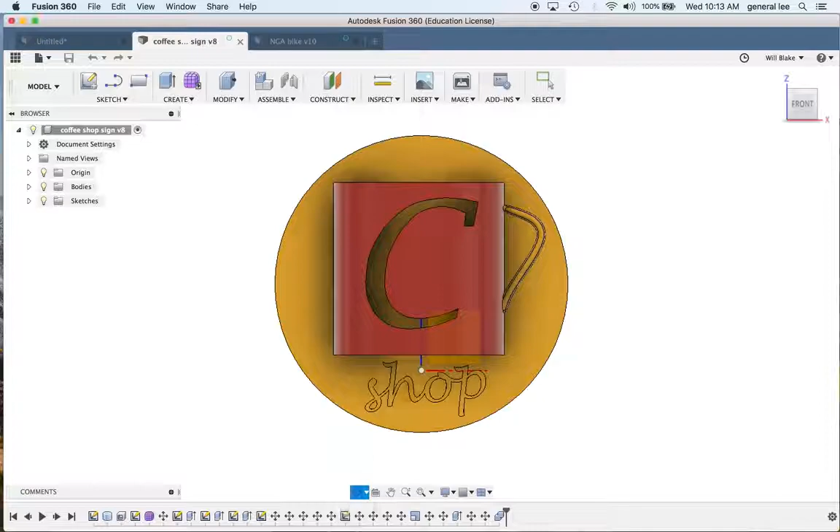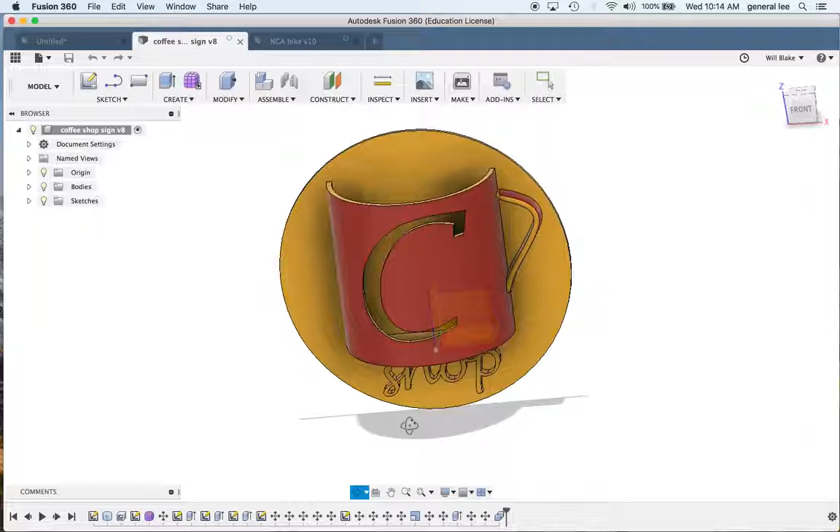So I just wanted to show you some of the designs. This particular sign was something I created very quickly - it's a coffee shop sign that you might see somewhere around. If this was a 2D graphic, that's what you'd see on the wall, but the beauty of 3D is that I'm able to create something that has depth, that you can manipulate three-dimensionally. I could actually print this out on my 3D printer in a variety of large sizes - we're not limited to very small output anymore in the color you see, and I'll generate this at some point in the next couple of days.

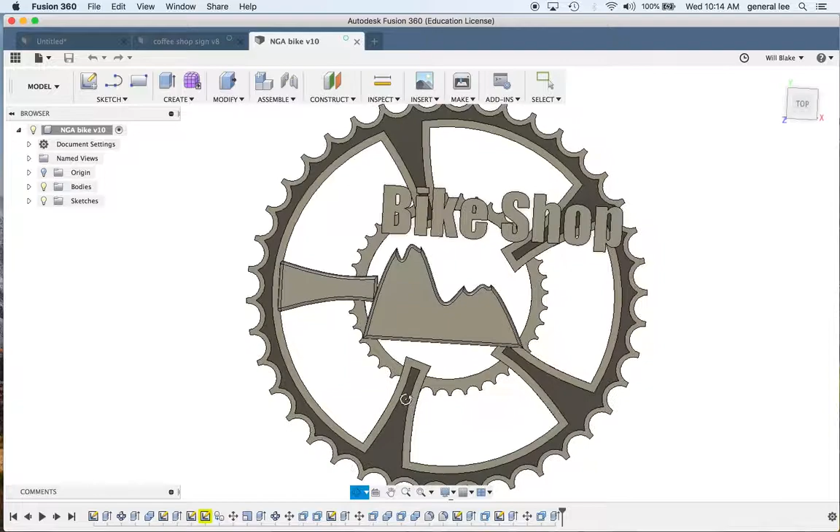Another sign I created was this bike shop signage. If you look at that as a 2D sign, you'd print it in a variety of colors on a metal sign or whatever. But the beauty of 3D is the ability to create that in a three-dimensional workspace, and you can output it as you see it, so it would actually look like the cogs - raised signage like a little mountain range, and we can do it in various colors. I actually printed this one out, and it's on my LinkedIn, one of my LinkedIn postings.

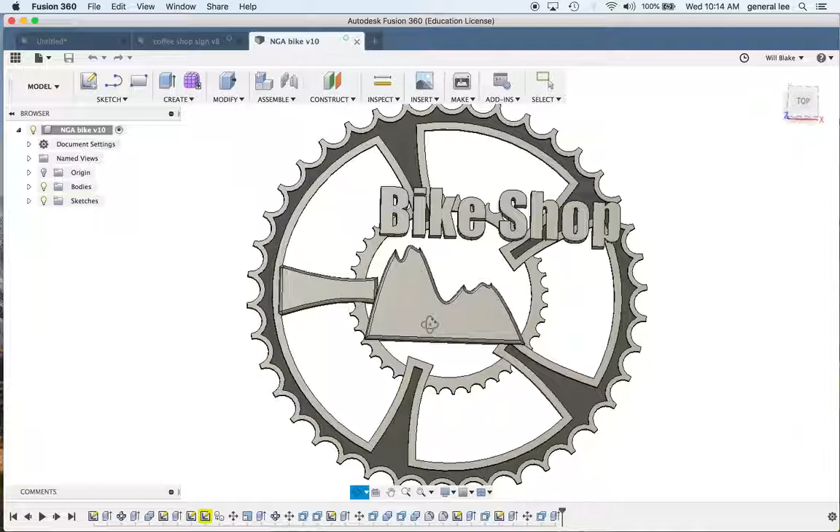So anyway, let's get going. The purpose of what I'm doing is to show you how you can use a 3D design program like Autodesk Fusion 360 to generate 3D graphics. Again, I can't stress how important I feel this is - that we need to bridge that gap, get artists and others thinking in a three-dimensional mindset of what you can do to be competitive, to add a competitive advantage to what you do.

This is just to give you an idea - not of how to use the software, because that's way beyond this, and there are people much smarter than I am - but of what can be done to generate forms very quickly.

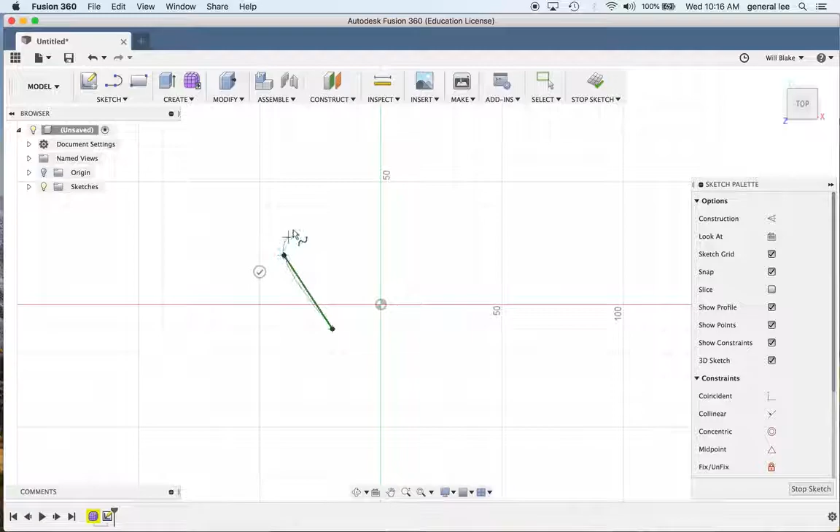So what I'm going to do is create a very simple jug here. I'll show you very quickly how we can generate this shell and generate a handle for it. What I'm going to do is sketch - we're going to sketch a spline right on this two-dimensional plane here. The great thing about splines, if you're familiar with them, is basically a series of points with curvature which we can manipulate, and what we're trying to do is generate a profile here. There are key commands for these various commands, but we're going to generate a few lines. So I'm going to close this sketch, stop the sketch, and you can see that's what it looks like.

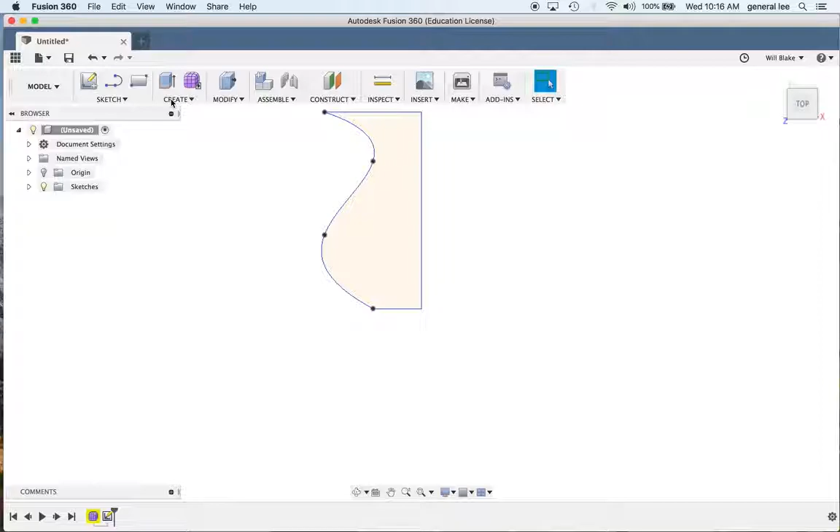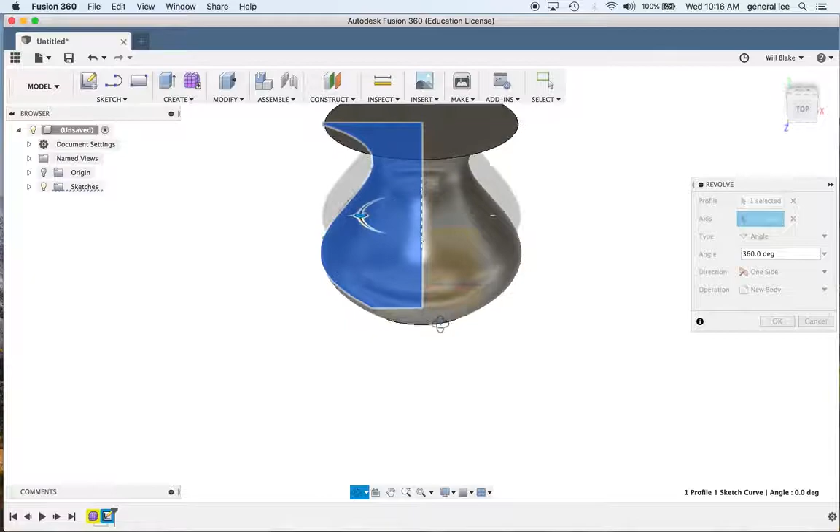What I want to do now is turn this particular sketch, this plane, into a three-dimensional object, and the way we can do that is very easy. I'm going to revolve this particular sketch on this plane, and you can see it's taken that two-dimensional sketch and revolved it around 360 degrees. Now I could have done that at 90 degrees, or 180.

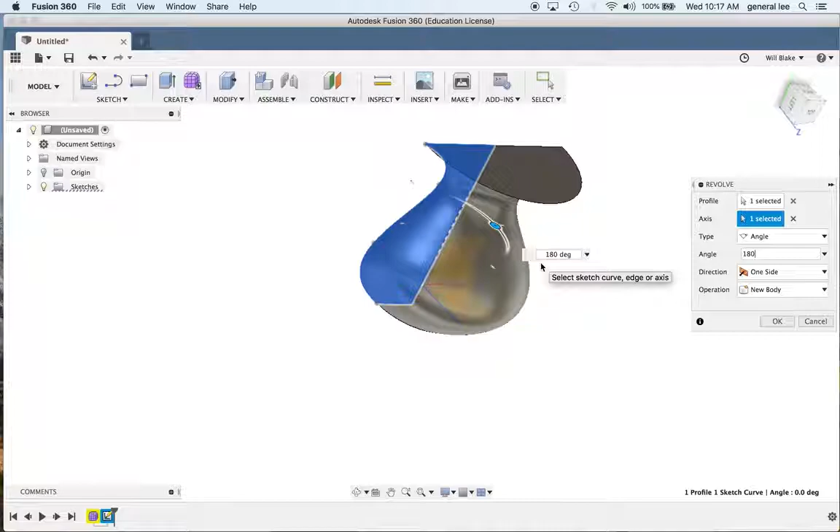Why would I do that? Well, if I was doing this for signage and wanted a 3D look to, say, a jug on a pottery signage, I could do this. Now I'm going to go back to the 360 real quick, click OK, and there we go. That's not a particularly good jug because you can't pour anything into it, so what I want to do is generate a shell of this.

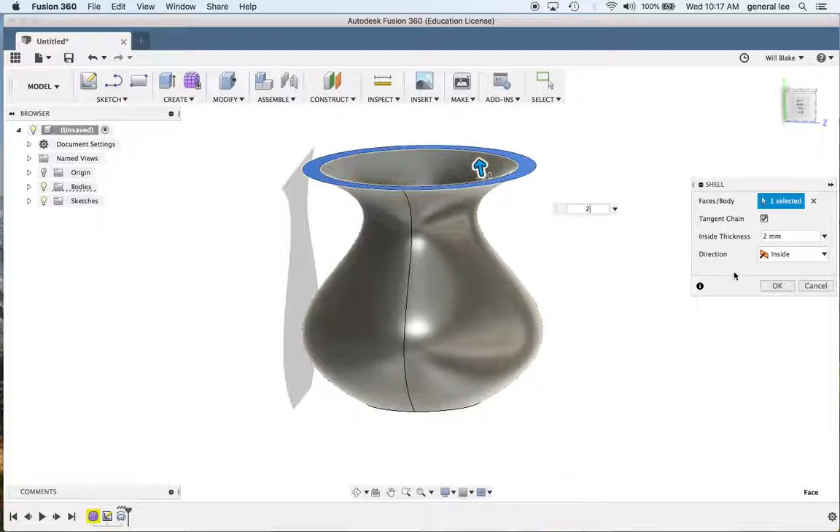So I'm going to select the top, say 2 millimeters, and click on OK. And if we look, we can look down into it, you can see that it's got a thickness of 2 millimeters.

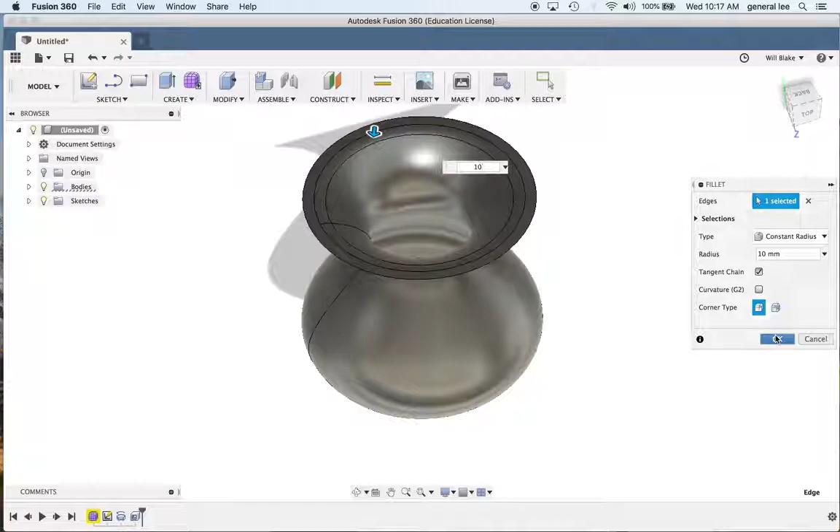Now obviously, a jug doesn't have a flat edge on the top like that, so we're going to modify that. We could do a chamfer, which is a straight edge, or a fillet, which is a rounded edge. Let's say 10 millimeters. If we look very quickly, you can see we have a rounded profile to the lip. Okay, great.

Well, a jug without a handle is not particularly useful, so what I'm going to do is put a handle on here very quickly. The way we do that is to go into the sculpting environment, and I'm going to use the same feature that I used before.

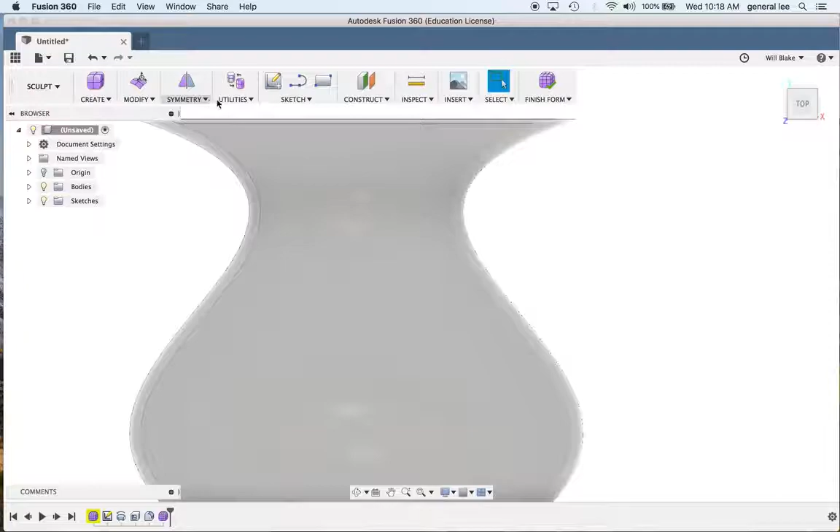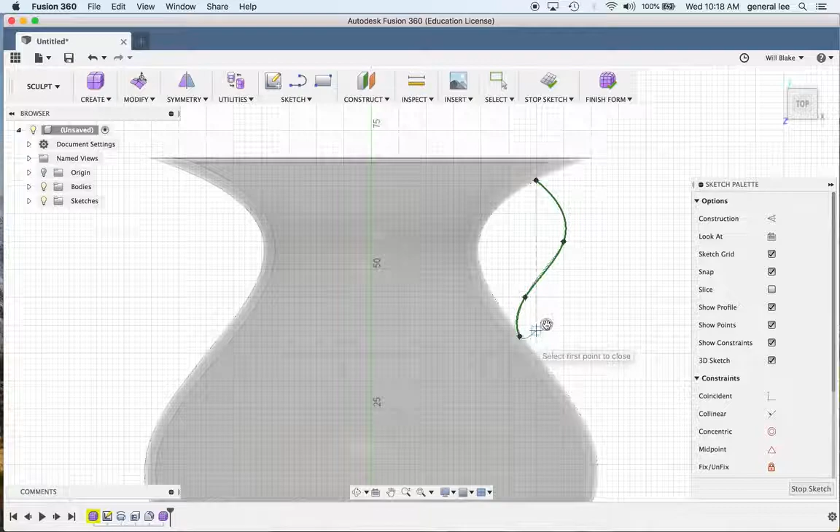I'm going to sketch a spline, and we're going to specify the plane that runs through the center of the object. That'll make sense in a minute when I sketch. So I'm going to come up here to the edge, and I'm going to end there, stop that. And if we take a look at this, you can see what I mean - right through the center of that jug is the plane on which I'm sketching.

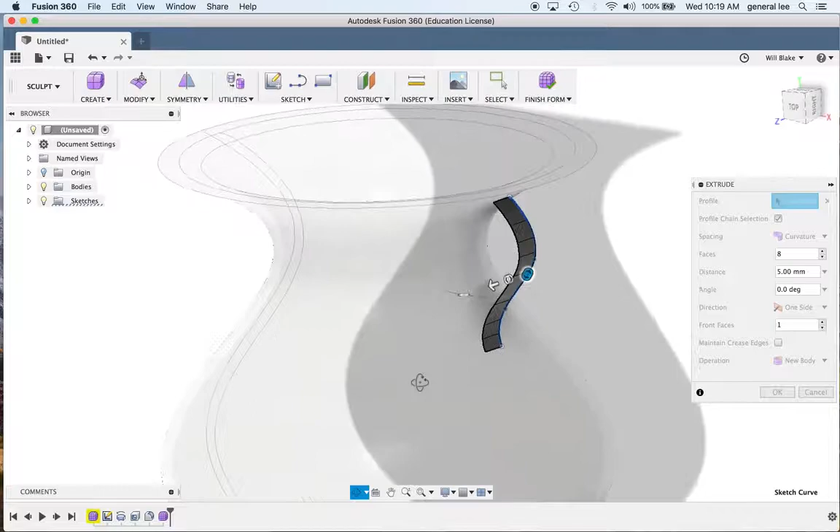I've created this spline. What I want to do right now is extrude that, and you can see that I actually extruded it from 5 millimeters, but let's say I want to do 10 millimeters. All right, I'm going to click on OK.

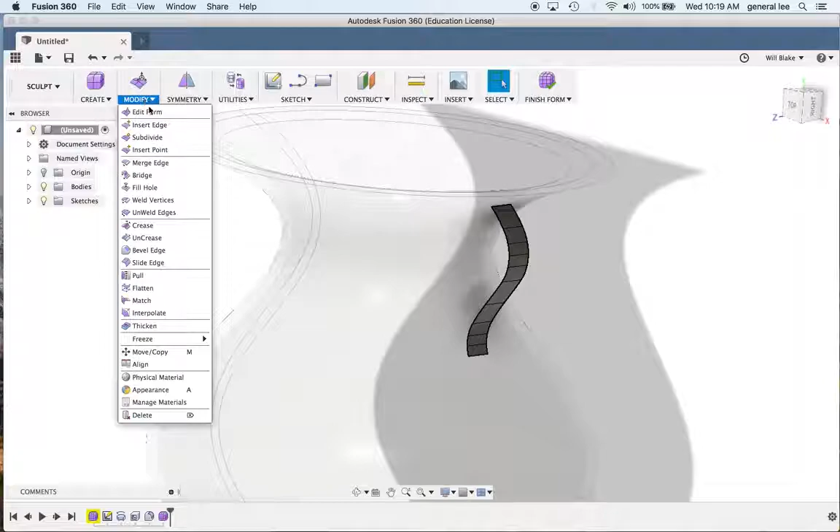That doesn't do us any good because there's actually no depth to that - it's not a particularly practical handle. So what I'm going to do is thicken that, and we're going to go there and thicken this object. I've got 3 millimeters, I want soft edges. We click on OK, and you can see that I have a handle.

So I'm going to finish this form. Now you can see that it's not a particularly good handle because it's in space, so what I want to do is move and manipulate that.

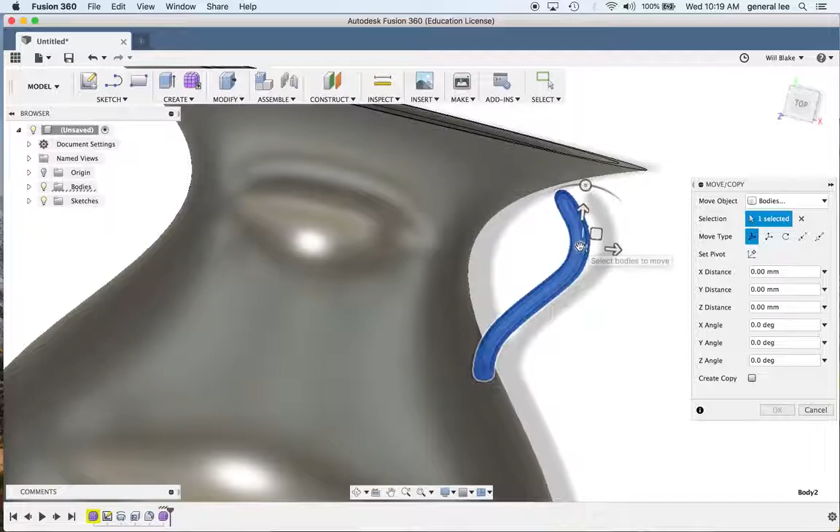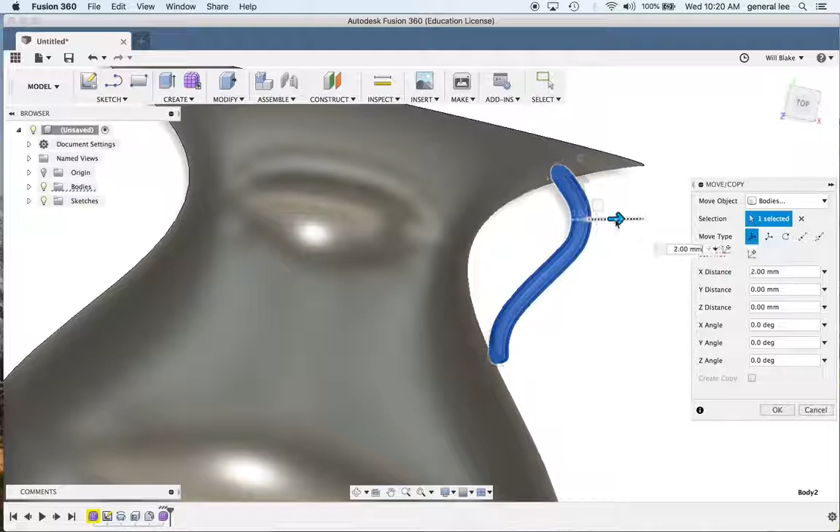What I'm going to do, let me show you in a three-dimensional manner, is actually rotate that somewhat, and then move it, pull it out just a hair, and click on OK. And what we have is a jug with a handle.

Not bad, eh? Now at this point I could actually 3D print that, which in this particular environment is very easy to do.

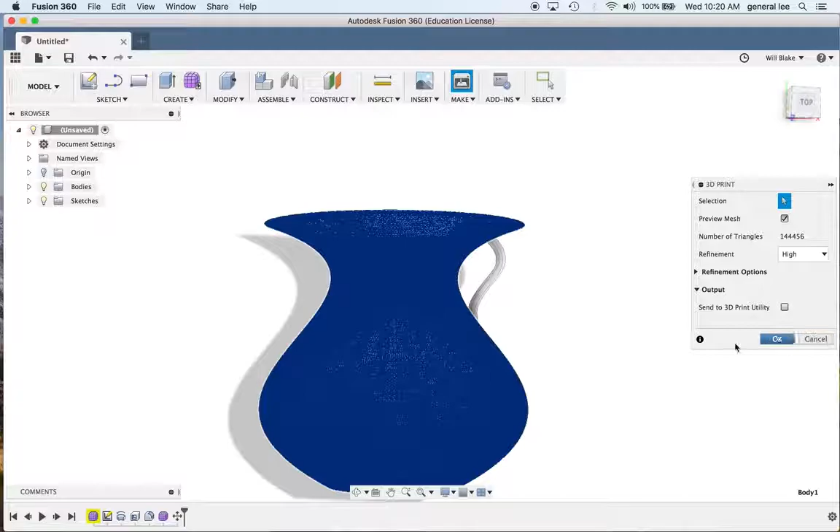Make 3D print, and at this point I would actually select this. What may happen here is it may not define that properly, so what I have to do is combine that with the other object, which I can do very easily. I go modify, combine, select that object, click on OK, and when I go make 3D print, I can reselect and I'll get the whole object.

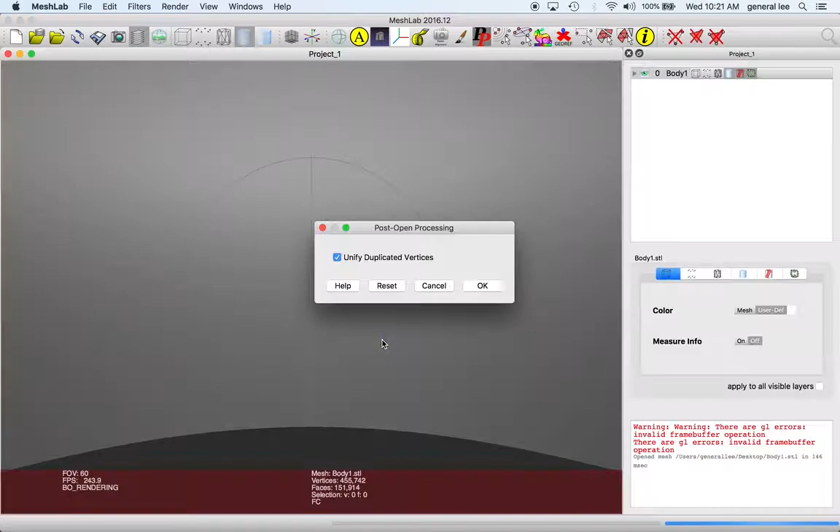And click on OK, and let's save that as body 1, save it to the desktop, and we have ourselves a 3-dimensional object. Let me see if I can pull it up real quickly. And there you go, we have our 3D generated object.

So let me go back to Fusion 360 real quick. One of the questions that I get is, well, okay, that's great, what about a lip on the jug?

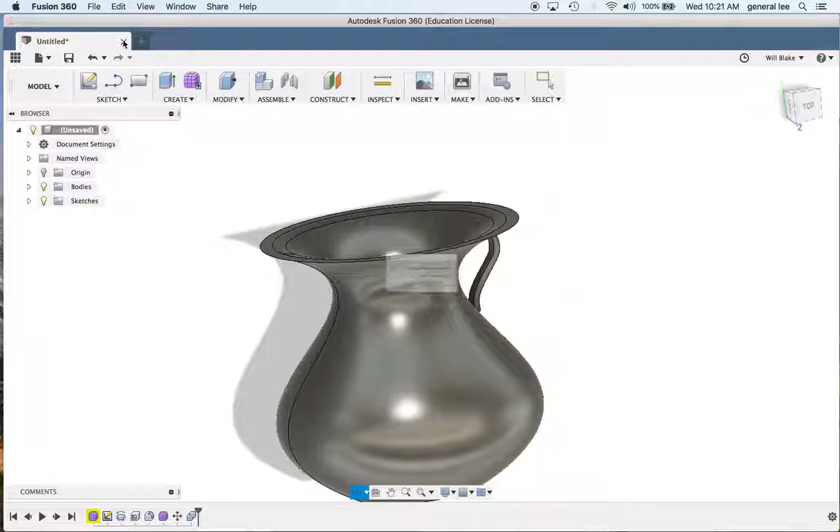Well, the way we do that is we would actually generate the same thing in the sculpting environment. Pick a plane, do a really basic spline object, same thing - sketch a line so we get our closed space.

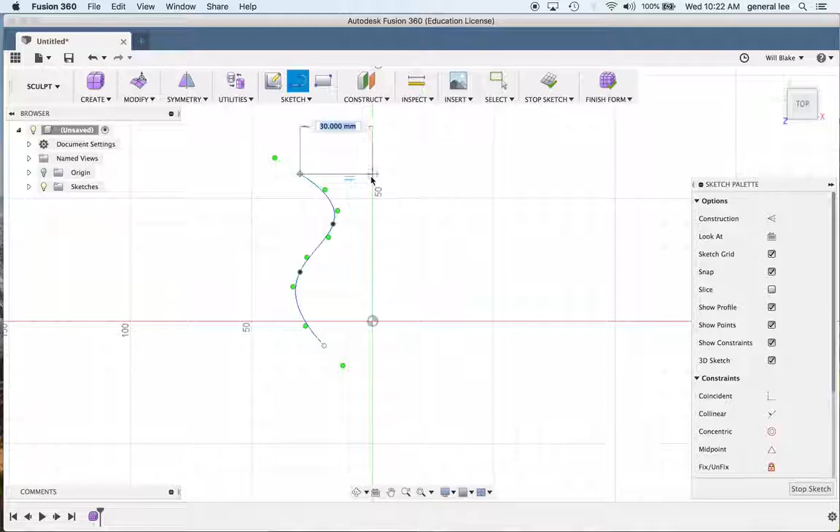And what we're going to do is the same thing - we're going to revolve that particular object around the center axis. Click on OK. And what we would do here is actually manipulate some of the faces.

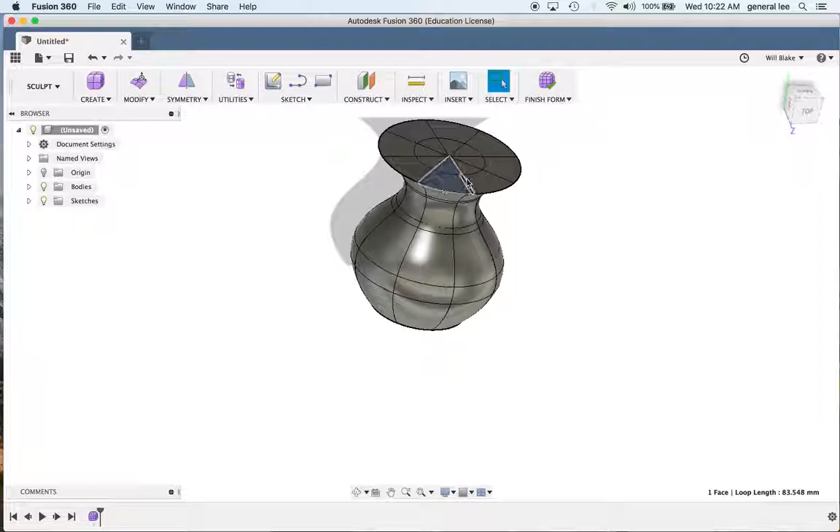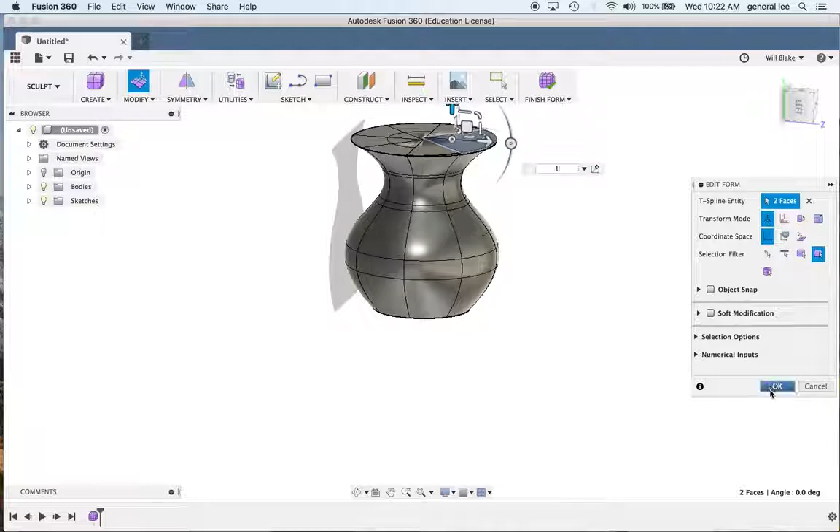And we're going to edit, and what it does is it gives us the ability to pull, and so on. Or we could change it up, so on and so forth, and we could generate a lip, so on and so forth.

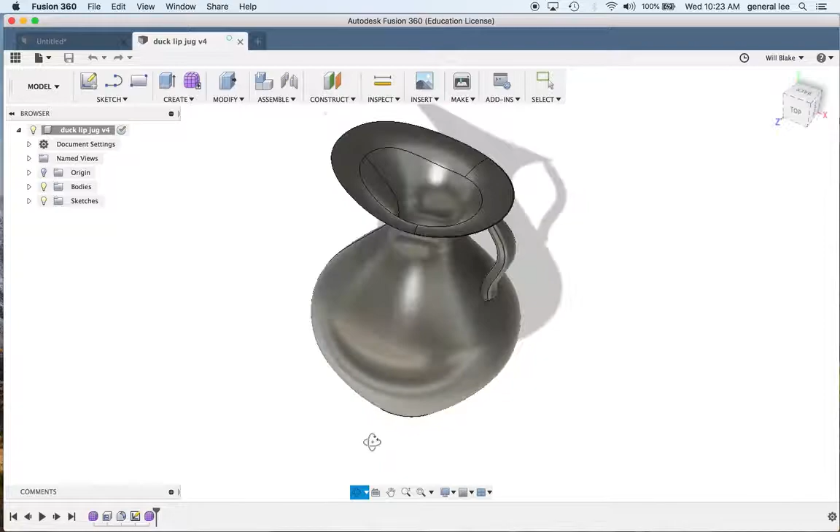Just to give you an idea of one of the things that I generated previously, if I can find it, was the duck lip jug. And the duck lip jug was generated using that particular feature in Sculpt, create a handle, so on and so forth.